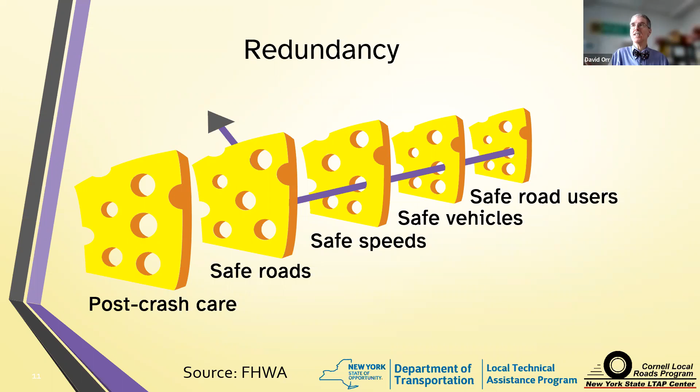And if you think about it, look at the disasters that we talk about. Most of them happen because of multiple things going on. And if we can stop even one, we can keep the crash from occurring in the first place. So keep that in mind as we're talking about intersections, but actually keep it in mind when we're talking about safety in general along the highways. Now, the goal for today is intersections and the alignment therein.

So in the PollEv that's up on screen, type in what you think the goals of a good intersection are. What makes a good intersection? Safe, okay, good. That would be something I think we can all agree upon. Clear sight lines, that will help with safety. Could be a pedestrian focus. We've got to deal with all the users. It should be simple. I see people throwing in the Q&A.

That's good. Clear to understand, clear assignment of right of way when you're coming up on it. Good visibility. Should get capacity, clear traffic quickly, somebody put in the Q&A. Great. That really is a capacity issue. We need to be able to get vehicles and all the users through it safely. Easy to navigate, accounts for all the users, smooth flow. Okay, so we all are on the same page on what makes a good intersection. Who uses our intersections?

So type in, we're going to create a little Wordle. Who uses our intersections? Let's just see what y'all come up with. I'm curious on this one. Who uses our intersections? And again, you can put in the Q&A if you don't have any other way. Cyclists, pedestrians, somebody put cyclists in the Q&A, bikes, cars, could be vulnerable users, motorcycles, traveling public, people.

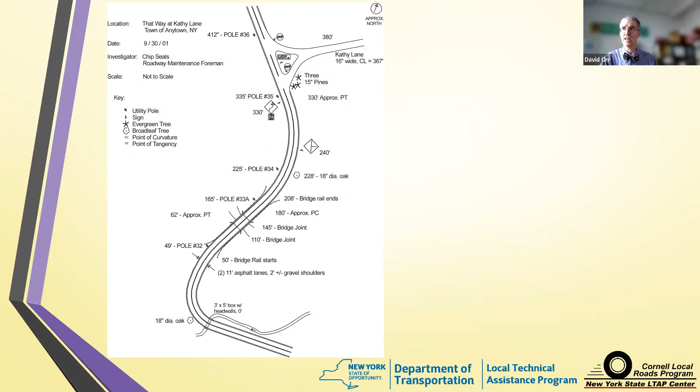Now, when we talk about intersections, even in an urban area, if you look at percentage of the mileage of the roadway, intersections are a small percentage of the mileage, okay? In a rural area, like we have on our little diagram from our class, intersections are a small percentage of the length of the streets, if you look at center line length, okay? But let's just think about that. What percentage of crashes occur at the intersections? Is it 20%, 30%, 40%, 50%, or 60% of all crashes? Let's see what y'all come up with.

Most of you are saying 60%. Now, this is national statistics. It varies quite a bit by different agencies, and your agency might be different, but let's just see what y'all come up with here. I'll take a sip of my coffee.

Most of you were saying E, okay? Almost 2/3 of you said E. Turns out, actually, it's about 40% of all crashes occur at intersections nationwide. However, over 50% of the fatal and serious injuries occur at intersections, okay? That's really the place where most of the serious crashes occur. The ones that are not at intersections that are serious tend to be run off the road or involve pedestrians and cyclists away from intersections. But run off the road is a pretty serious one away from the intersections. At intersections, we deal with different types of crashes.

So what kind of crashes do we worry about at intersections? Again, let's see what we come up with. What kind of crashes do you have to deal with? Right angle turn crashes, yeah. Okay, rear ends that are fatal, T-bones, okay. Angle crashes, blind crashes, rear enders. Somebody put pedestrians into the Q&A, yeah. Pedestrians is an issue, wrong way, okay. There's all kind of different crashes, side swipes, all kinds of stuff that we can deal with.

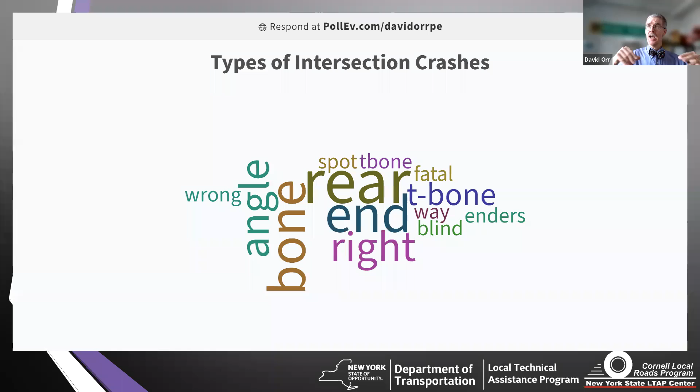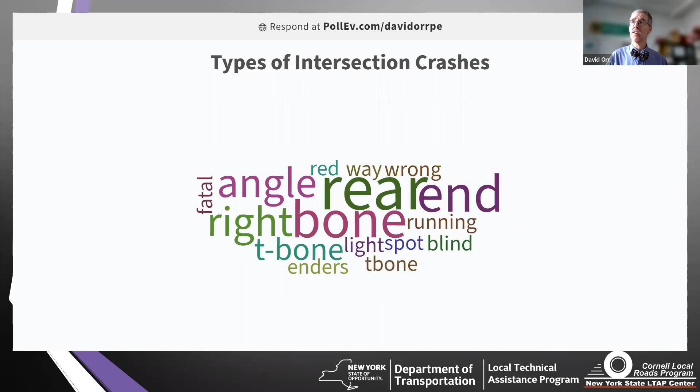And there's some very good information, by the way, on the types of crashes that we can deal with on that federal hyperlink that's in the handout. It's an FHWA webpage on intersection safety, and there's some good ideas for low-cost safety improvements there. And again, we'll talk about a workshop we're bringing to New York if we can get the numbers up.

But let's look at an intersection. We're just going to look at a simple four-way, and let's look at the conflict point. So if you think about it, and we'll see if my pen wants to wake up here, if you're driving down the road and you're going straight, you got another vehicle coming this way from the left. There's a conflict point where those two vehicles could hit, okay? That's a crossing kind of conflict. That's not a good one. That's actually the more serious kind of crashes that we can deal with.

We could also have a kind of crash where you want to turn right, and as you slow down to turn right, the person behind you comes in and creates a conflict point there. We call that diverging. Rear end is a very common one in that particular case, especially when you have a stop control type situation where someone has to stop, either through a traffic light or even a yield sign, and the vehicles don't give them room and they hit. At low speeds, they're just fender benders, property damage only, but at high speed, they could get pretty serious.

And then, of course, there's merging, because as you're turning right, there's another vehicle coming in here, and if you don't see them, you can hit into each other, or merging, side swipe, as you all mentioned. So these are all the kinds of crashes that you could have. And so let's erase the ink on the slide.

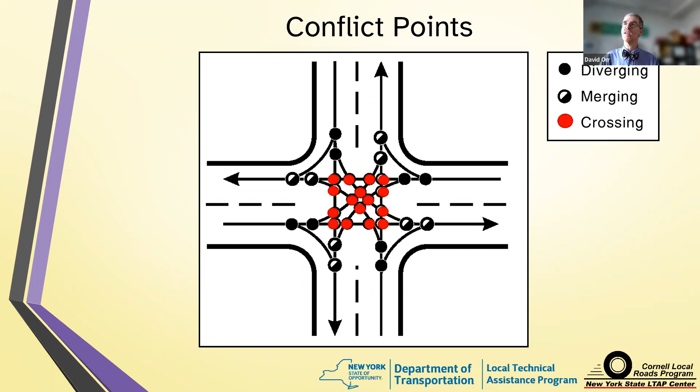And let's just show this with a little drawing. So you can see, if we do it all up as a typical four-way intersection, we're dealing with 32 vehicle conflict points. Okay. And a lot of them are crossing types of maneuvers, which are the more serious, the more likely to lead to serious and/or fatal injuries, especially as high speed comes up. So the middle of the intersection is the dangerous point, something to think about. And that's just vehicle with vehicle.

But of course, we have crosswalks. Now, here in New York State, if I have an intersection, even when there's not a marked crosswalk, it is a crosswalk by New York State vehicle and traffic law. Okay. I don't technically have to have the stripes, but the stripes really help. They improve safety. They make it easier for everybody to understand what are the safe places or safer places to walk, and really do a good job in terms of delineating the intersection. So crosswalks are really valuable, but they add, of course, to our conflict points.

So we've got all those conflict points before, but we also have additionally all the conflicts where vehicles are crossing the crosswalks. And each time you have that crosswalk, you're going to have 6 conflict points. Now, some people say, well, there's only 2, because you've only got the traffic going right here. Come on, pen, there you go. And here, crossing that crosswalk at the bottom.

But realize, each type of vehicle is going to be looking in different places. Vehicles going straight tend to want to see what's in front of them. Vehicles turning left are worried about the people they're turning left in front of. They may not even see the pedestrian. And people going right are worried about the vehicles coming from their left. They may not be looking for the pedestrian. So we do treat them differently because we need to think about solutions for those people in a different way. So keep that in mind.

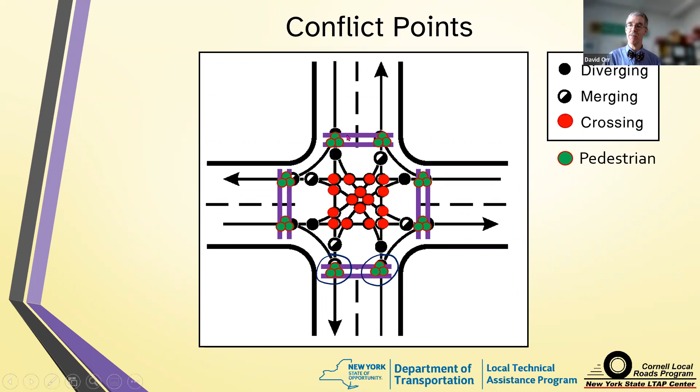And of course, if people break the rules, go against the light, go against the walking symbol, people can get hurt. Now, in this particular case, the gentleman who walked against the crosswalk, the hand was up, they still walked, only broke their arm. So just so you know, it turned out to not be as serious as the video shows. But now we get the vehicle going through a red light, crossing, conflict point, created a serious crash, could have been fatal very, very easily. Okay. And again, if we had stopped one of those 2, we probably would have had at most a crash, but not that real high chance of a fatality with a pedestrian.

And why is that so critical? Well, it turns out speed really does matter when it comes to people who aren't inside that metal cage we call a vehicle. Okay. At 23 miles an hour, and yeah, it was originally done in metric, which is why it doesn't round to nice even US customary or imperial, for those who like that word. At 23 miles an hour, if a pedestrian gets hit, it's about a 10% chance that they're going to be killed, about 22% chance that there's going to be a serious injury. So overall, about 1/3 of the time, it's a pretty bad accident.

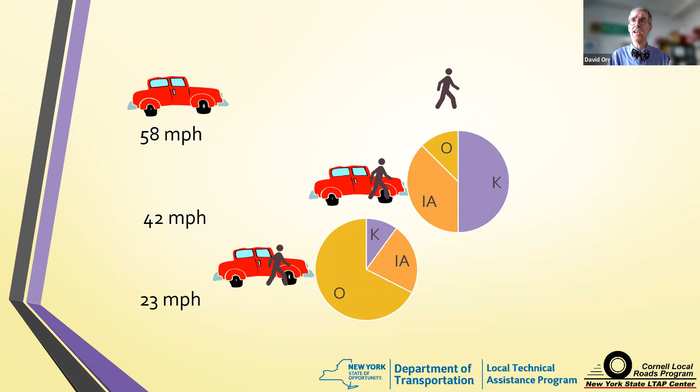Okay. At 42 miles an hour, and hopefully we don't get those kinds of speeds at intersections in urban areas, but at 42 miles an hour, 50% chance of a fatality, 1/3 chance of injury, and only about 12, 15% that you're going to walk away with something that's not considered serious. And of course, if you get up to 58, or state speed limit plus a little, which we tend to see people drive, 90% chance that you're going to not be able to walk away ever. And a 99% chance of a serious kind of crash. Okay. So speed makes a difference.

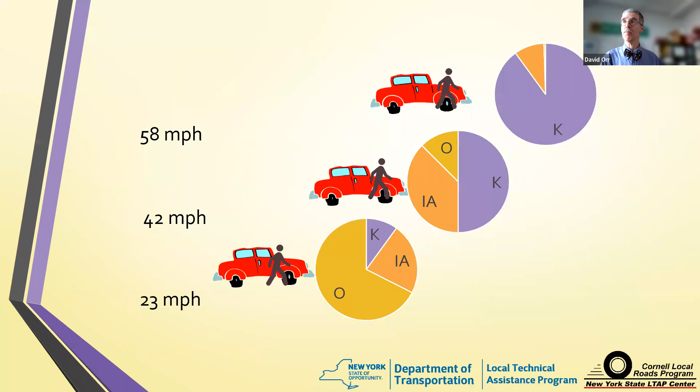So as we're thinking about intersections, fundamentally, we want to slow people down. At the same time, we need to think about capacity. So that really comes down to geometry. There are tons of geometries for intersections. We'll talk about some of them, but let's talk a little bit about the geometry, the traffic control, crossings, things like that. We'll end with some miscellaneous ideas. Now, in terms of geometric standards, the most common is the AASHTO Green Book. That's really going to be the place you want to start.

Here in New York State, you can go to the New York State Highway Design Manual, which is available online. It pretty much is the Green Book with some minor changes due to what New York State supports. If I had to pick one, I would probably go to the New York State Highway Design Manual because it's available online. But there are some things in the Green Book you might want to look at as well.

For those who have low volume, there are some low volume standards. Most of the stuff on intersections in there is pretty much pointing at the AASHTO Green Book, just so you know. There's a little bit in there, but not a lot. It's a relatively thin document, really aimed at the widths and turns and curves. It's not really an intersection kind of document. So you really want to get access to the Green Book or the Highway Design Manual.

Some people could develop your own standards, but the reality is you need standards that can support you if something does happen and you go to court. So my advice is go find a good standard like the Green Book or the New York State Highway Design Manual and go from there. Okay. Now, in terms of intersection alignments, this is just 8 that we list in our little handbook, our little book on road safety.

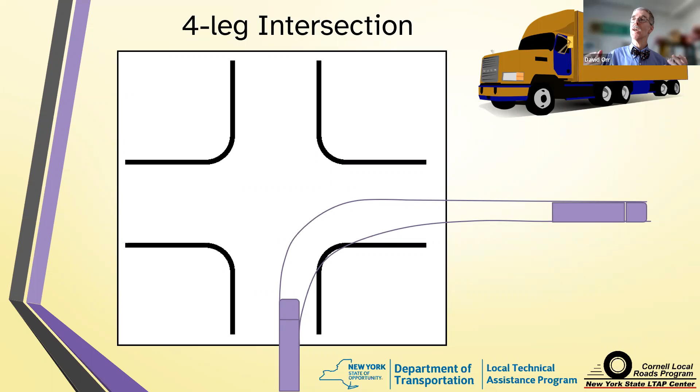And as you can see in this case, if it's a tight radius, it's going to be a challenge for that truck getting around the corner without hitting the curb, okay? So we have to think about that when we're laying things out. So there's the template that we have to deal with. So we don't want him to go over that corner. But we like having a fairly tight radius, okay? That radius makes it better for pedestrians. It's the shorter distance to cross over. And so this is something to keep in mind.

We don't want it to be too big of a round corner, because if it is, it makes it longer for the pedestrians. If you came in here and you made this flatter so the truck could get around, now the pedestrians coming down here on the sidewalk would have that much longer of a distance to have to cross over. We really don't want to do that.

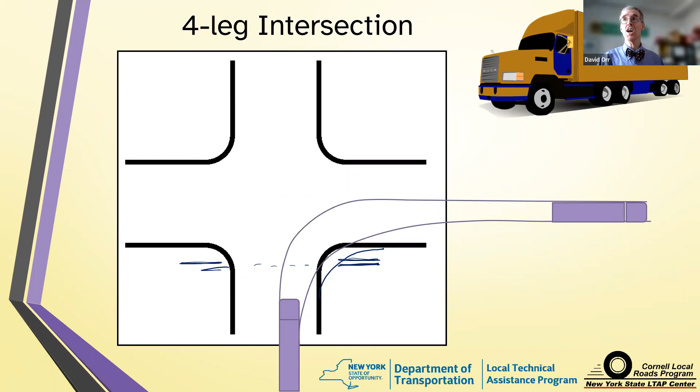So just ask yourself, I'm in an urban area or even a non-urban area, what do I do about tight corners? What kind of solutions can you think of for a tight corner radius? Okay, give me some ideas for some tight corners. How would you deal with that? How do you deal with that now? How does traffic deal with that?

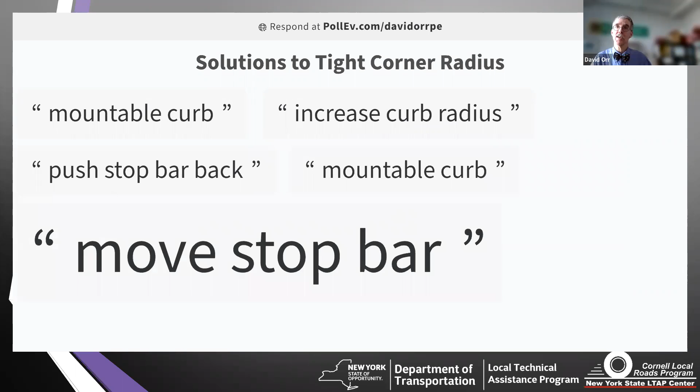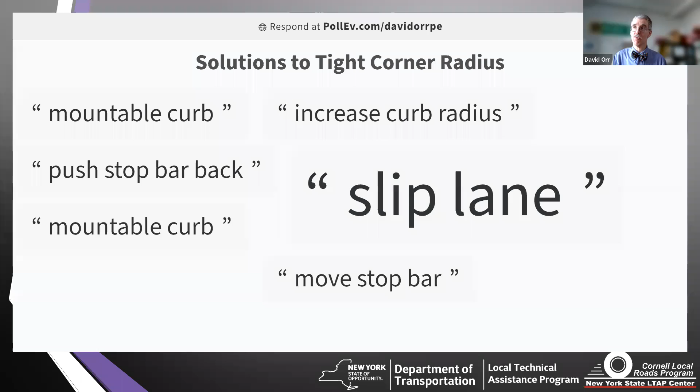You could do a mountable curb. You could increase the radius. You could push the stop bar back. Okay. You could put in a slip lane. If you had the space, you could put in a turning lane. We see that all the time, especially when there's space. Okay, that works really well in a rural area. May not, crossing over into the other lane.

We see buses do that all the time here in the city of Ithaca, and you see that in most cities. The buses actually have to go over the center line to be able to make the sharp corner. Okay, that's not always going to be feasible. So as we're thinking about improving safety upon our intersections, we have to think about the vehicles that use that intersection. Okay, whether it be buses or whether it be single unit trucks, which are common, or even the once in a while semi that's coming in to bring in someone who's moving in.

The neighborhood I live in, we had 2 moving trucks in the neighborhood yesterday. It's not really great from a standpoint of getting a truck in there, but luckily the traffic volume is such that they can get away with it once in a while. But if there's a high volume, that can be very difficult. For those of you who are from the New York City area, it's going to be really hard to increase the radius. It's going to be really hard to channelize. You couldn't put in a slip lane. So that can be a challenge sometimes. So again, just thinking about it from a fundamental standpoint, how do you deal with that tight corner radius?

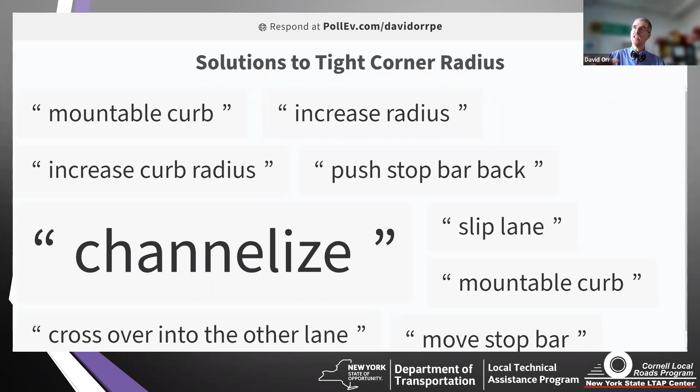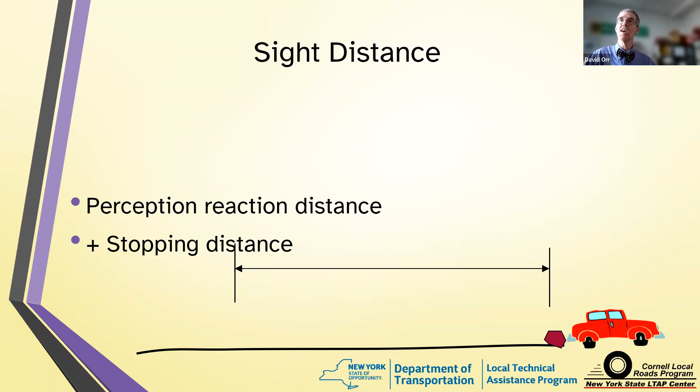Okay. Now, sight distance, we've all known it's about that perception reaction distance and stopping distance before hitting a vehicle or hitting an object. Intersection sight distance is a bit more challenging because we assume the vehicle has stopped. So it has to accelerate, get up to speed to get into traffic. So the distances are actually pretty long. So there's not just the perception reaction or stopping distance that we see for stopping sight, but we also have that acceleration distance. So we actually have to add in a little bit more for intersection sight distance.

If you look at it, the sight distance, it's safe for right turns and left turns are varied. And there's also the crossing distance. And you can do the calculations, and it does vary, and there are some variations that exist. The most severe case is either the left turn or the crossing distance. The left turn, because you not only have to get up to speed, but you have to get into traffic. And you have to look in both directions. Now, looking in both directions can be a challenge because you got to look once, then look again, and maybe look a third time. It actually adds to the time it takes to make the maneuver. Crossing, you have to get the entire vehicle across, and that can be a bit of a challenge with vehicles coming in. And so the more severe is the left turn or crossing maneuver in most cases.

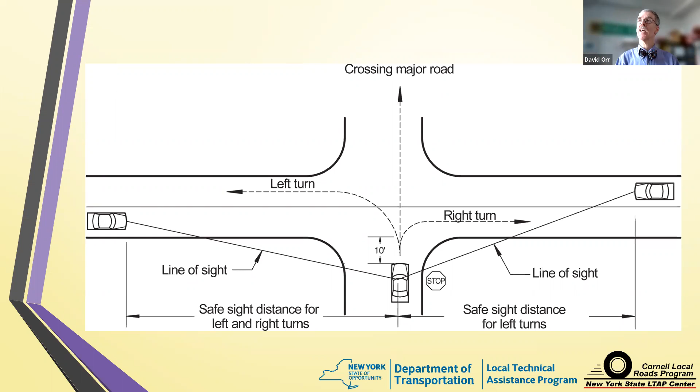So you could actually come in here and do the calculations. And for passenger cars at 30 miles an hour, which is the most common urban speed limit here in New York, you need about 335 feet of sight distance in that sight triangle where the vehicle is sitting at either the stop sign or yield sign or no crossing control at all. At 40, it jumps up to 450. By the time you get to 60 miles an hour, which, let's be honest, a lot of people do that on the 55-mile-an-hour state highways, you need 660 feet for just a passenger car. You need even more if you're driving an SU truck because you got to get up to speed. And a tractor trailer might need as much as 1,000 feet of sight distance to really make the turn safely. That can be a bit of a challenge.

Now, you're all going, well, how do I measure that? I got an easy way to measure the sight distance that you need. Don't use distance, use time. And actually, the nice thing about using time is that it works. This is what's fun about it. It works for the intersection already. You don't have to know what the speed limit is. The intersection will tell you whether it's safe or not.

This idea actually comes from a gentleman who works for Albany County now, used to work here at the local roads program, named Jim Markle. And the idea is convert the distance into time. So you take the sight distance that's calculated, divide it by the speed times 1.47. You went, why did you do that? Well, sight distance is in feet. The speed is in miles per hour. And the 1.47 is feet per second per mile per hour. So everything crosses out, and you wind up with seconds.

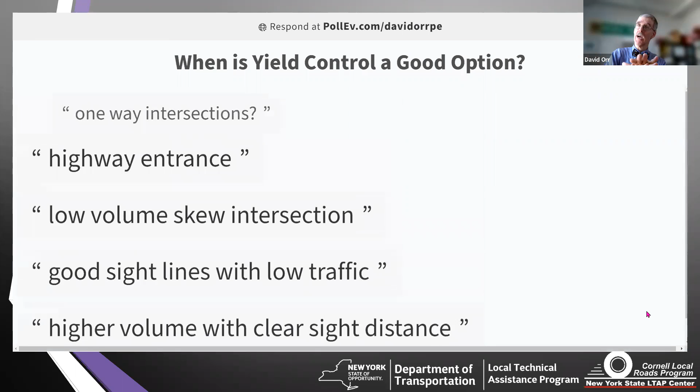Highway entrances where you've got merging operations, possibly one-way intersections. But it still comes back to the idea of sight distance and think about, can people see? One way I like to think about whether you're going to use a yield sign or not comes out of our traffic sign handbook that you can look at too.

And that is, as a vehicle is approaching the intersection, can they see far enough to where if there is a vehicle coming, they can stop. It's a good way to think about it. You're driving down the road, says yield, you look in both directions, you don't see traffic, you go on through. But you should have enough time to stop before you get to the intersection for any vehicles coming in. So that means you need to have sight distance, not just where you're standing at the yield sign, but far enough back to where you can stop.

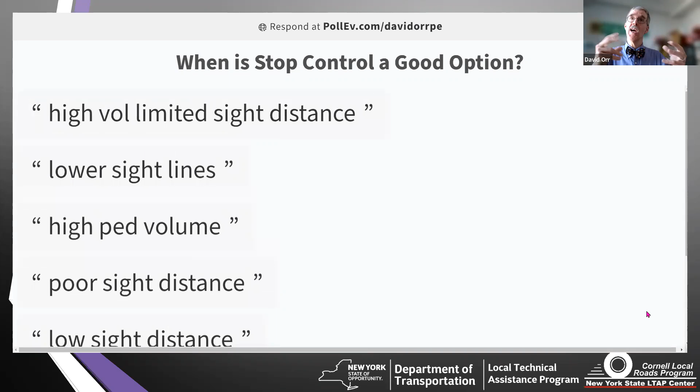So then, of course, when is stop control a good option? Okay, so tell me, when is stop control a good option? For sight distance, yeah. Okay, it's very busy, there's lots of traffic. Okay, so poor sight distance, lots of traffic, very busy. And could be just because there's high pedestrian volume. If you don't have that, how do pedestrians cross, or vice versa? How do cars get through if there's so many pedestrians? So yeah, we typically use stop signs to control who has the right of way.

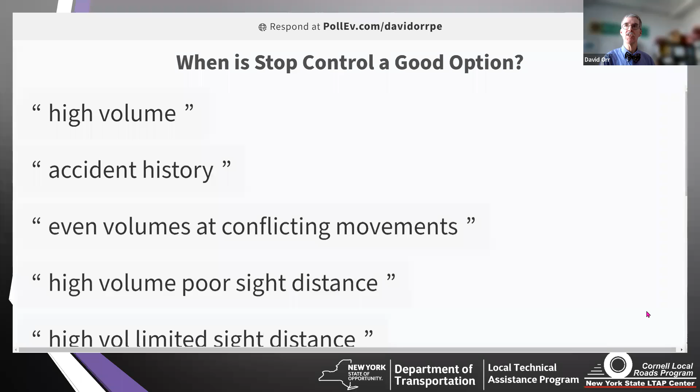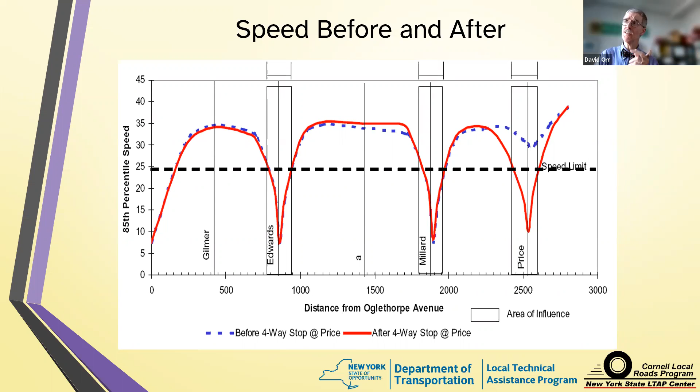So you may want to think about other options. Traffic calming is one option you could look at, but be aware of the fact that stop signs in and of themselves can actually create problems and do tend to lead to more rear end accidents. Hopefully property damage only, but those can be severe if the speeds get too high. So just be careful when you're putting up stop signs. Now, of course, at some point, you may need to think about using a signal. When is a signal a good option? When would we want to put up traffic signals versus just having a stop sign? Very high traffic volume, yep.

A lot of left turn movements can't be made. A four-way stop sign isn't very effective because of the volumes involved, heavy traffic in one direction, to give right-of-way assignment, especially conflicting volumes. I mean, if you look at Manhattan, almost every intersection is controlled with a traffic light because of issues of visibility, speed, capacity. All those things come into play. And when you get high volumes, you almost have to think about that. There are warrants for that, okay?

The warrants need to be met, but remember, there's going to be an economic issue involved, okay? They may cost more. You're going to have electricity, which maybe in an urban area is an issue, but somebody's got to pay for it. The one thing I will tell you, once you get to the point where you're thinking about signals, especially if you're not a professional engineer, go get one. Get somebody who has done this and understands what they're doing.

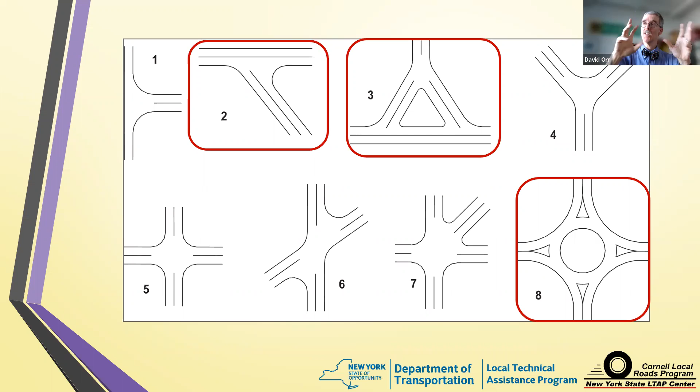In particular, I want to look at 3 intersection types that tend to cause us a lot of grief. The highly skewed one, we could also look at number 6 down there, but let's look at highly skewed. Let's look at the big Ys, especially the ones that are 2 legs coming off a delta, as some people call those. And then we'll end with a little bit on roundabouts before we do some case studies to end the hour. Highly skewed intersections, they're way too common, okay? Really don't want to have a highly skewed intersection.

In the Q&A, tell me, why do I want to be perpendicular, or at least as close to perpendicular as possible? Why is that recommended from an intersection standpoint? Why do we want to get rid of skews wherever possible? In the Q&A, give me a reason why we prefer perpendicular, or at least as close as we can get. It improves the sight line in both directions, and that's the key, in both directions, okay? Because now you can see left and right equal amounts. So yeah, we want 90 degrees. They'll tell you you can go off just a little bit, but we'll come back to whether that's a good idea in just a couple of minutes. But yeah, it really is a sight lines issue, okay?

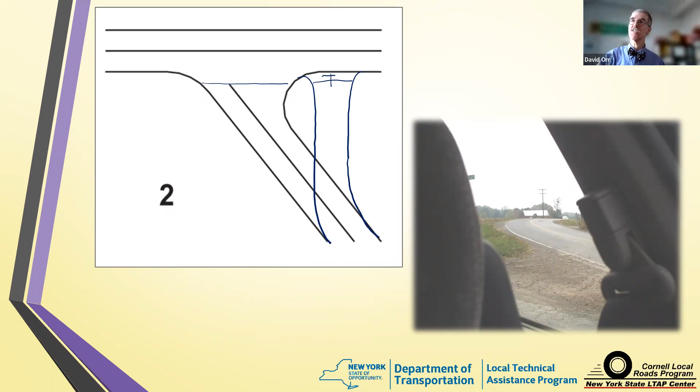Now, this is one place where they realigned the intersection because they wanted to get rid of the highly skewed intersection. Do me a favor, if you go through the effort of realigning it, remember the vehicles using the intersection. For the longest vehicle that uses it on a regular basis, you want a tangent section in that perpendicular long enough to fit that vehicle. In this case, if the intersection has a lot of trucks, you're actually going to want to align your intersection such that, and make 2 lanes. I'll get my lane width better this time. There we go.

Enough room for that tractor trailer in this particular case to sit completely tangent when it's stopped. Okay, it's longer than you might think. It turns out really important to have that vehicle straight before it makes its next maneuver, which is probably going to be from a stop situation. And of course, you need to think about the turning radius and the movements of that truck as it's going around the corner as well.

And it can lead to head-ons, which are some of the most severe crashes that we can get, even at relatively low speed. Let's not rely on the airbag to keep people safe. Let's have them not actually hit each other if we possibly can. And you may need to widen it, which of course creates problems for pedestrians as well. So that's something to keep in mind for the highly skewed intersection.

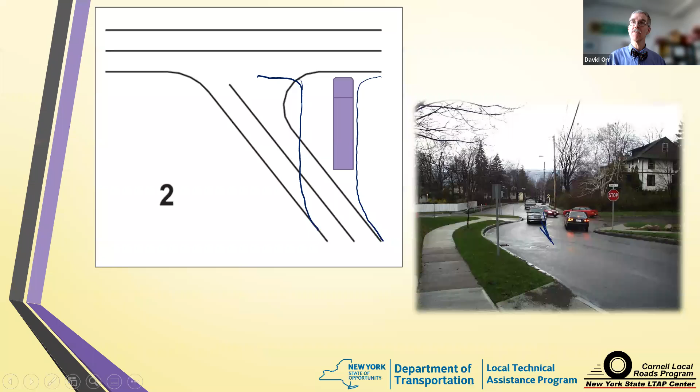The Y intersection, okay, and there are lots of them out there. And I'm not going to say we need to go out and get rid of all of them immediately, but in the Q&A, what's the risk of these big Y intersections? Why is it something that we're a little concerned about when we see them? What's the concern? Put that in the Q&A for me.

They're confusing. How do you do traffic control? Where do you put the stop signs up? I mean, who has the right of way? Okay. You may not be aware of others that are around you. In this particular case, we might have a stop sign coming onto this county road from a town road, but do we put a stop sign here? Do we put a stop sign up?

Whoop. Get my pen right here. Do we put a little stop sign here? So we're going to have a stop sign here, a stop sign here. Who has the right of way at this part right there? Okay. And of course, people go through those things at high speed. So it's something you got to be aware of as you're rebuilding the roadways, as you're looking at them. You may want to think about options for these big Ys.

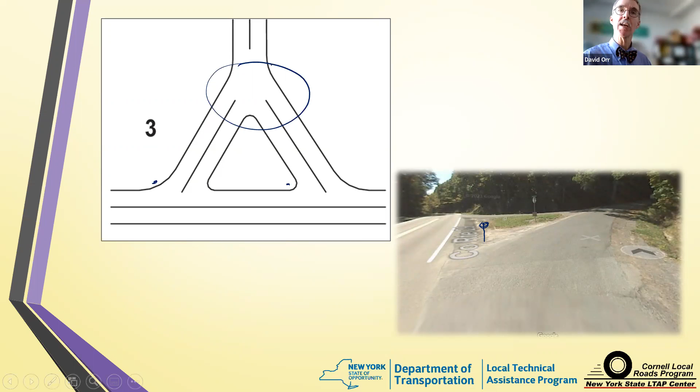A couple of options that exist, obviously the most likely one, let me get rid of all the ink here. And I'm going to change the pen color to a dark red so that you can see it, but it's not too hard to read. You could just bring the road in straight. Again, the radius would be set by the vehicles using it. You could do that.

Really low volume, you might even be able to leave this turning lane. You might be able to leave a turning lane there. I've seen people do that very successfully. Okay. You might even be able to have a turning lane pulling into it. Again, depending on the traffic. But think about the users. Think about, is it pedestrians? Is it bicycles? Lay it out carefully and try to make sure that it's clear, easy to understand, and has good capacity.

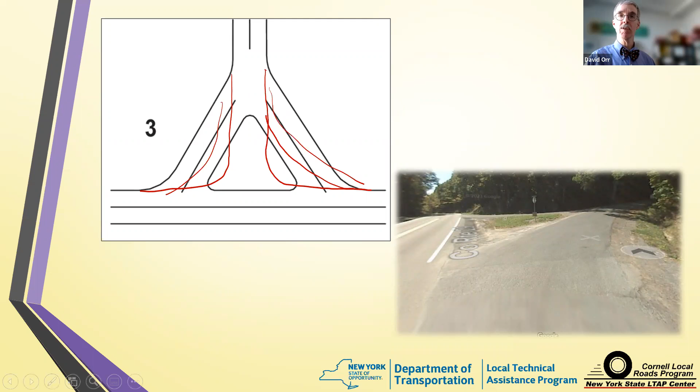The one thing we want to be careful of with these big Ys, and another reason that I'm not a big fan of them in some situations, this one's not too bad, but I've seen ones where vehicles coming this way from the left think they can cut, make that quick turn, and mistime it with a vehicle going this way. That conflict can be very high speed.

You're talking in some cases combined speed differences of 90 miles an hour or more. Very, very severe, very, very dangerous crashes. Airbags are not going to help you there. Okay, you really don't want to get that kind of crash. So think about that when you're doing that.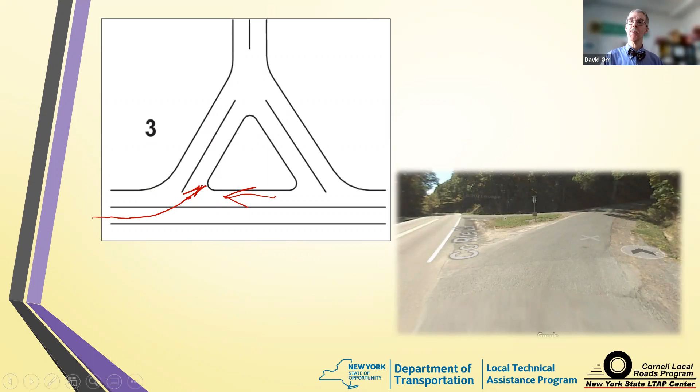And then of course, everybody loves the roundabout. Okay, now I haven't had you do this yet, but we're going to ask you, how many of you have roundabouts in your community? Raise your hand if you have a roundabout in your community. Okay. So out of the 50 or so of you online, about a third have roundabouts. Actually getting above a third. Okay, so about a third of you have roundabouts.

Okay. Now, I'm going to magically lower all your hands. How many of you would like to put another one in? You like them enough, you want to put another one in.

Okay, again, not quite as many of you. Okay, that's good. You may not have the space for it. Roundabouts aren't something you can put everywhere, but it's something to think about. Roundabouts are popular. Why do you think they're popular? In the Q&A, throw it to me. Why do you think we like roundabouts?

Maintenance costs versus having a light. There's no stopping. You can maintain throughput, minimize the delay. You got fewer conflict points. Yep. Keeps traffic moving. No traffic lights. It actually is a safety issue. If we go back and look at the conflict points for a roundabout, as you can see, there's no crossing conflicts for vehicles. Put that in emphasis, for vehicles, only diverging and merging, which, while that does happen, tend to be property damage or low injury kind of crashes.

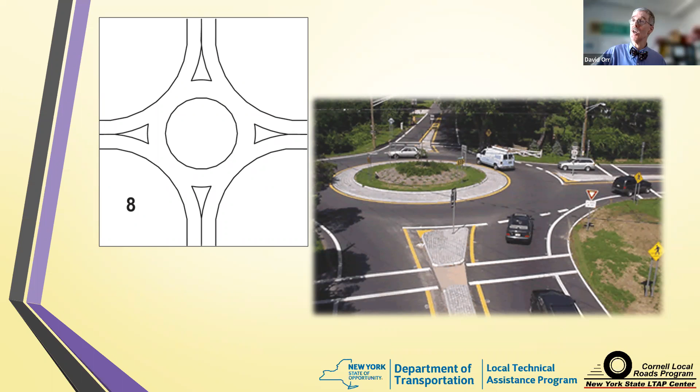So think about the connectivity to bring people. Otherwise, they may wind up walking in the roadway, especially in the winter if you're not plowing the snow, and that's not going to be safe for anybody. So keep that in mind.

Now, somebody asked the difference between a roundabout and a traffic circle. Traffic circle is the name we typically use for the old style that tended to either be fairly high speed and risky, or they're really tight, like you see in Washington, D.C. They still have traffic circles with multiple roads coming into them. They're not laid out really in the same way. A roundabout really is designed to slow vehicles down, but still have good capacity, okay?

Do I see people cut the corner? Yeah, I see people cut the corner. But they actually can be fairly effective in a small urban area where you don't have a lot of right of way, if you don't have a lot of trucks. Okay, so in a residential area or a place where it's only single unit trucks, mini roundabouts can work.

I was actually out in Seattle last week, and they're used all over the place in Seattle, not in the urban core where the hills are pretty steep, but in the residential areas, they use these an awful lot to help slow people down and sort of help control the right of way and get rid of some of the crossing maneuvers, or at least slow down the speeds that people can make for those crossing maneuvers. So those can be fairly effective.

So we could cover more. We could spend a whole day. Actually, people do spend a whole day just on an intersection. Well, what I want to do is give you some of the fundamentals. And now what I want you to do is think about what would you do in some situations. I've got a few here. We'll finish our hour together with some case studies. It also meets our PDH requirement. But what would you do? So I'm going to first show you the picture, let you think about it for just 20, 30 seconds, and then we're going to pull up a Poll Everywhere that will let you put in your answers, okay?

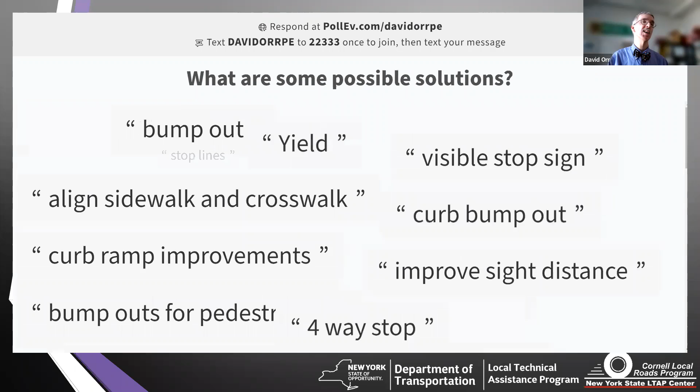Maybe put in some yield signs. Think about places where yield signs might work. Maybe a four-way stop is needed in this particular case. Okay. Maybe you're looking at a stop sign going straight. Part of the reason they didn't want to do it is it's a steep hill. They want vehicles to be able to keep going up the hill and not have to lose all of their momentum before they went up the hill. Okay.

Let's scroll down and see what else you guys had. Whoop. Went too far. Come on. I'm fighting with it. It's winning.

Four-way stop, improve sight distance, maybe even looking at totally realigning that whole intersection area. But again, short-term versus long-term fixes, things like that you can fight with. Okay. We got one more here. This is a fun one.

Here we have an intersection. You can see it right over the rise. The vehicle coming towards it. We're standing above the intersection. Here's at the intersection itself. Okay. Does that look like it's got a problem? So think about what you might do here. What are some possibilities for improvements and solutions? This time, give me just a second to clear the responses. Okay, so what would you do in this particular case?

Possibly change the vertical alignment so you can see that little bit of a dip, improve the sight distance. Okay. Maybe an intersection warning sign on the main road. Yeah. Maybe a flashing yellow. That's not a bad thought. Regrading the roadway, improve the sight distance. Okay. Okay, so all kinds of fun things people could come up with.